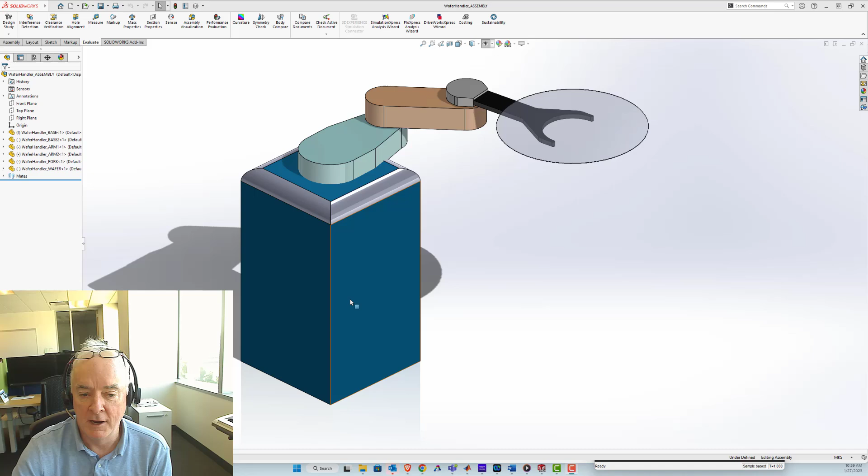So in this video, we're going to explore the operation of a staging system. Essentially it's a robotic arm, and its job is to move silicon wafers into and out of all kinds of equipment that embeds the silicon with the electronic circuitry for computer chips. And I'll just say that in this industry, accuracy and precision of motion are extremely valued.

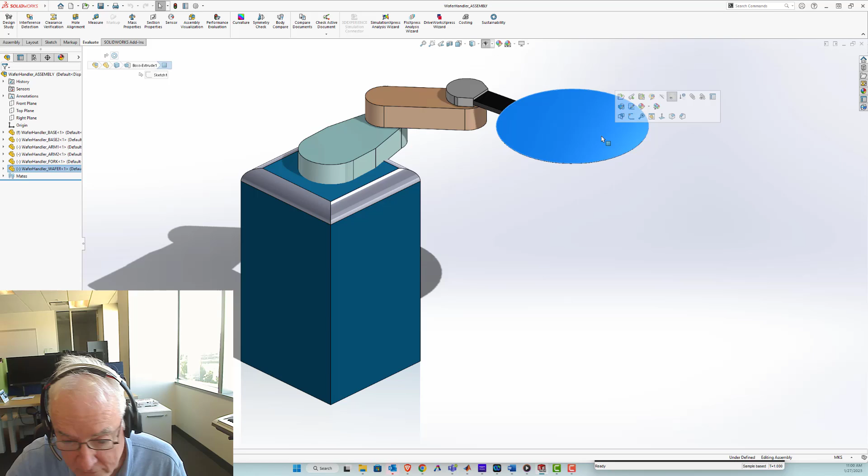Okay, so let's look at this inside Simulink. I'll bring up the animation environment for this. Let's reset it and rerun it. So basically we added electric motors and we put in controls, and the voltage will be controlled to these motors to achieve the movement that we want.

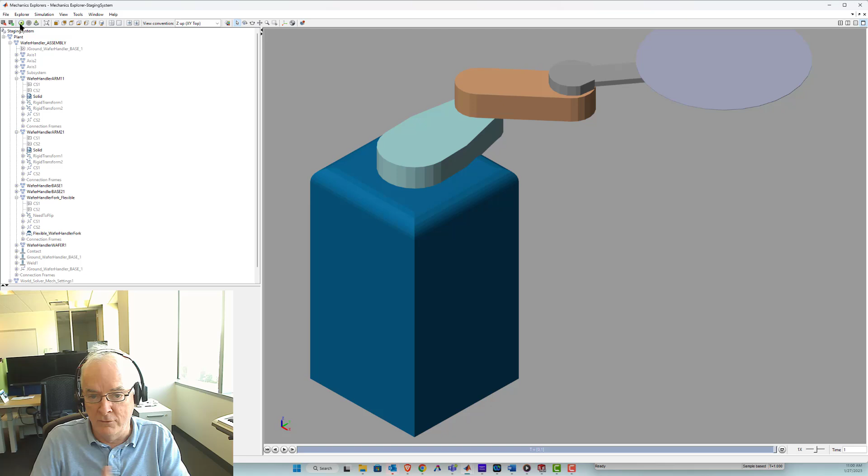It begins with a commanded motion signal, and then that gets operated on to essentially make the robot do what it does. That's a simulation of the electrical and mechanical components of the staging system. So here's our model, and here's what we just ran. We see it moving in this XY plane, and that's why X and Y have an interesting range of motion, but the Z just holds that position.

So what I want to do is get beyond a basic assumption of the mechanical motion simulation, which is that parts are rigid, and see what happens if they are allowed to deform just a little bit so they can vibrate. So I'm going to take this rigid version out. Actually, I'll jump in here to show you what we're working on. It's that gray piece right there. We're going to replace this rigid version with a flexible version.

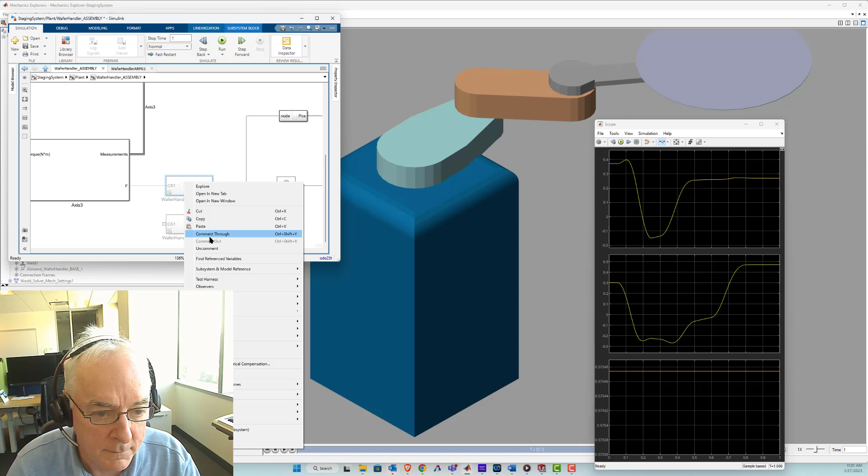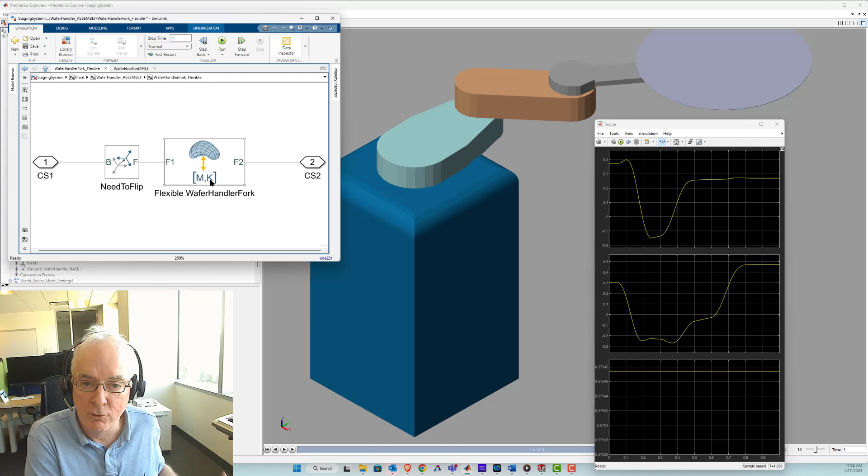So let's comment that one out and bring this one in. I'll double click on it. It's a little bit different on the interior. You're going to see this little meshed image, which indicates it's an FEA-based solution, which means we ran an FEA calculation ahead of time and figured out the mass and stiffness matrices. Through that we're able to integrate some vibration into the Simulink model. But let's not dive too deep into the details. So let's rerun that simulation, and I'll hit the run button right there.

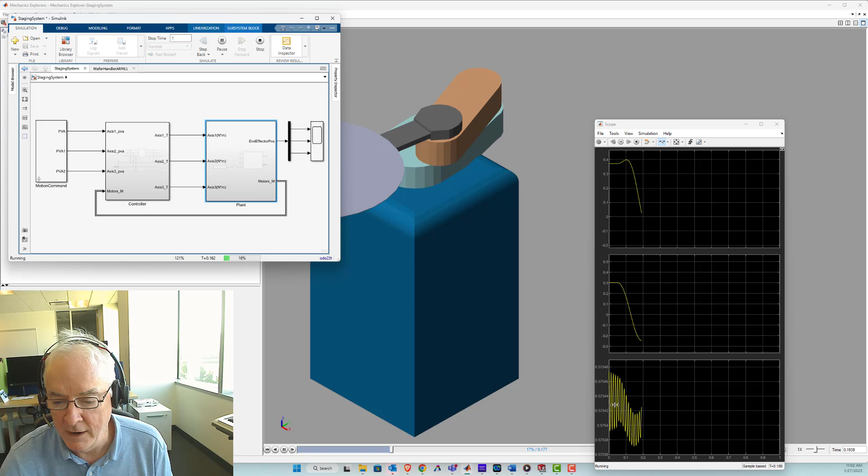You'll notice very quickly that vibration is taking place, and we see it in the Z measurement. For the most part, everything looks pretty close to what we had previously, the X and Y certainly, and you realize this vibration is occurring at the very minute scale shown on this axis, so it's a minimal amount. These parts are pretty solid, firm and rigid. They don't bend much. So this oscillation that defines the vibration is happening at maybe about 1/100th of a millimeter.

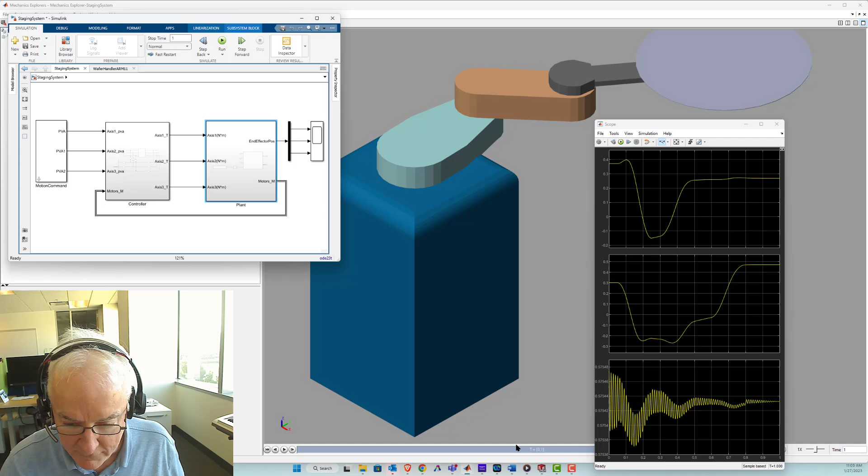Now we're MathWorks, and we're good at analyzing things, so I want to jump into this a little bit. I'm going to use a tool called the Simulation Data Inspector. You'll see axis 3, axis 2, axis 1. There's P, which is the measurement, the feedback, and C, which is the command, so how did we do? And 3, 2, and 1 represent the three motors that make this work.

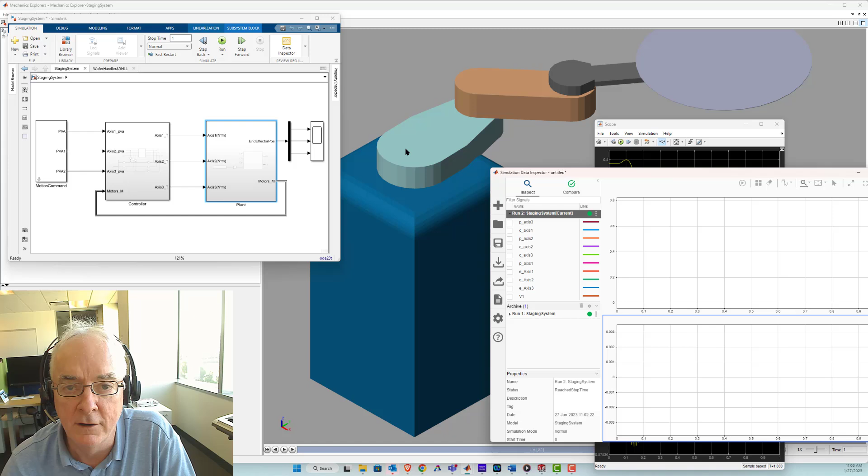The one that drives this first piece right here is called the axis 1 motor. Then we have the axis 2 motor operating right there, and the axis 3 motor controlling this part that we are also modeling as flexible. So I'm going to bring all this back and work from here. Let's look at how we're doing on axis 3. I want to plot. Oops, I'll do the top plot.

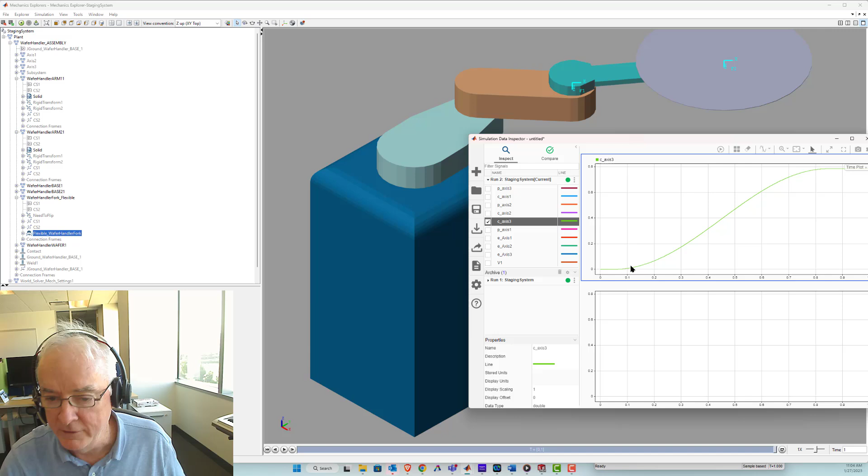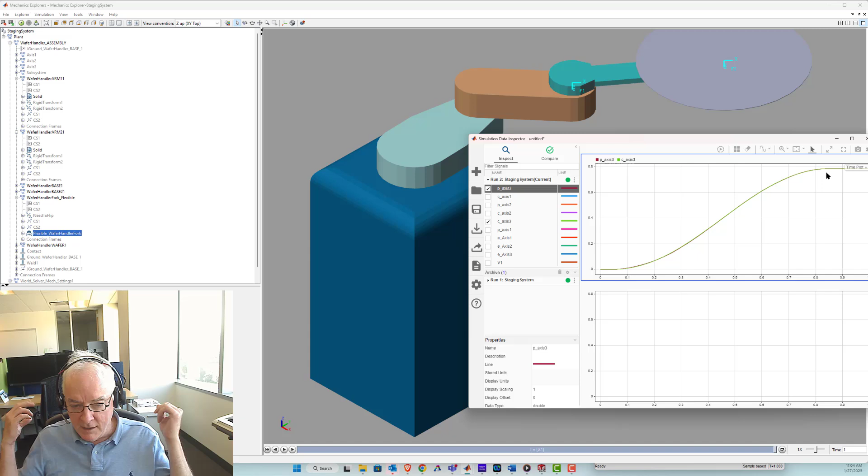Okay, that's what we want to happen for axis 3. It's basically a rotation of pi over 4, which, whatever it is, about 45 degrees, I believe, that takes place in about 1 second. Yeah, so the x-axis is time right there. All right, so that's essentially the trajectory we want, and let's compare it to p axis 3. And we'll see that these curves pretty much lie right on top of each other. And so, from kind of a standard assessment of accuracy, this looks awesome, right?

But let's recall we're in the computer industry, and the density of the electronic circuitry that will be embedded into these silicon wafers is measured at the level of like nanometers, right? And so what is it for a nanometer? I think it's like 10 to the minus 9 meters. I think that's where we're operating. So their interpretation of what's an okay positional error is way beyond what normal requirements will be.

All right. But anyways, it looks real good, and that error, which is the difference between these two, well, we're keeping track of that too, right? And so I'll show that right down here. And so with regard to these movements that are really in X and Y space that are associated with these rotations, you can see it a little bit better in the error function. So I just kind of dive in right there and you'll see that oscillation.

Now this is a rotational thing, and so whatever that is, on the order of like 0.002, well, that's in radians, right? And that's really small. And with regard to is that a problem or not? Well, let's compare it to what we had in the previous simulation where we considered everything rigid, right? Okay, let's show that, maybe in different, oops, show that in orange. Okay, and that's where I wanted to get to, really, with this video, all right?

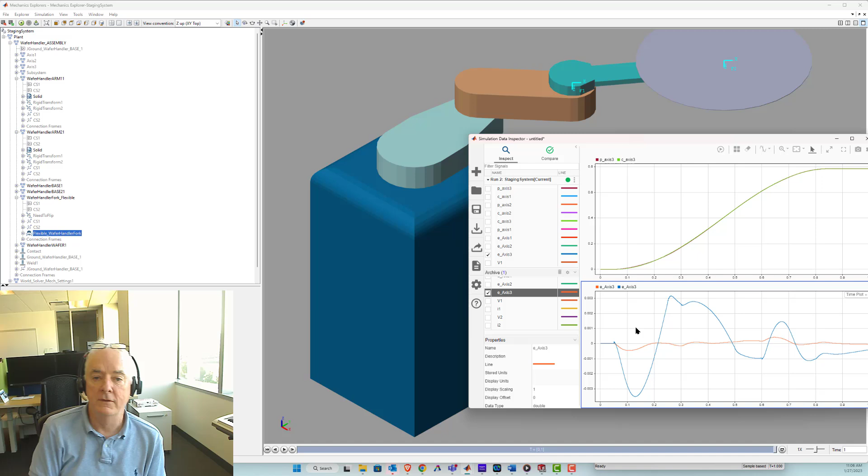And so my assertion is, wow, I think we got what we can do to help this industry to get better at staging systems, right? And what I'm getting at here is certainly this really tight level here. We're seeing that the mechanical deformation is occurring. It's small, but what I think is the most interesting is that little vibration needs to be in this calculation. We totally need the mechanics, but we also need the electric motors. We also need the controllers to really figure out what kind of problem will this ultimately generate.

And the fact that a system where the parts are truly rigid can reduce the error by, it looks like 90%. That this error, when we account for vibration, being 10 times what it was before, that's the whole point. And you only can get that if you are, at least from I'll call it my conjecture, my presumption, is that little vibration is a frequency that's triggering some dynamics in both the electric motors and the controllers. You might think of it like a resonant frequency that's leading to much more substantial error. That's taking place, and you can only see that if you're properly accounting not just for the mechanics, but also the electronics of the motors and the controls and things like that.